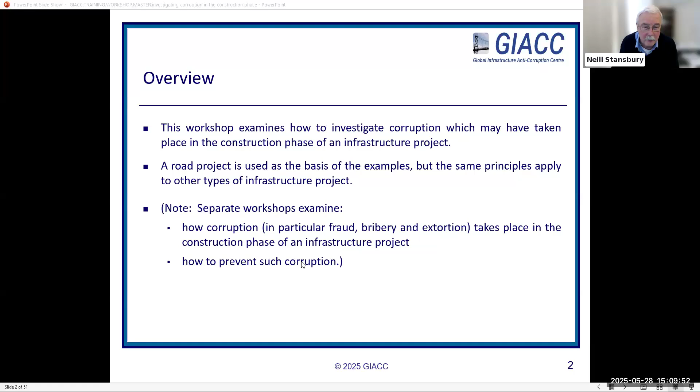So looking into it, we're going to look briefly at the contractual structure used in this example and the road construction method, just so you know the type of project we're looking at. Then factors complicating the investigation and what you need to do to prove the corruption. Then we're going to look at the case study methodology and facts, and various preparatory steps before you start the investigation. Under 4, we're going to undertake the investigation. As I mentioned, there are 3 specific issues which we will be investigating. Those of you who participated 2 weeks ago will, I'm afraid, see a little bit of repetition.

In sections 1 and 3, because of course there are great similarities in preparing for an investigation, whether you're preparing for an investigation in procurement or in the construction phase. What you need to understand and do in preparation is quite similar. So I apologize for a little bit of overlap, but I think it's necessary to restate it so that this workshop is a standalone workshop.

So first of all, these 3 corruption examples we're going to investigate in this workshop are based on a road project with a quite simple but quite common contractual structure. We're assuming there's a public sector road agency who owns the road and is commissioning its development. It is responsible for maintaining and building the major roads in that country. It appoints, after a tender process, a main contractor to build the road.

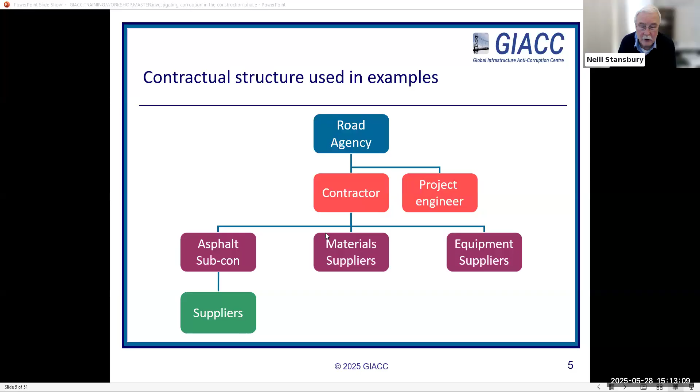If that is not done properly, the improper works are concealed by the next layer, and that is concealed by the next layer. So ultimately, you have a road where probably all you can see is the top course, the surface course. You cannot see what's underneath. So effectively, you have a gift-wrapped corruption Christmas present, because you can do whatever you like on the courses underneath if you're a corrupt contractor, and cover it all with a lovely wrapping of the surface course.

And people may not necessarily know, but then the road will break up. Then the question is why, and will the reason be discovered, and will the perpetrators be found out if they're acting corruptly? Therefore, these road projects can be so prone to corruption because of the inevitable construction method, with one course being covered by another one. Of course, you can test them, but this can sometimes be difficult and expensive.

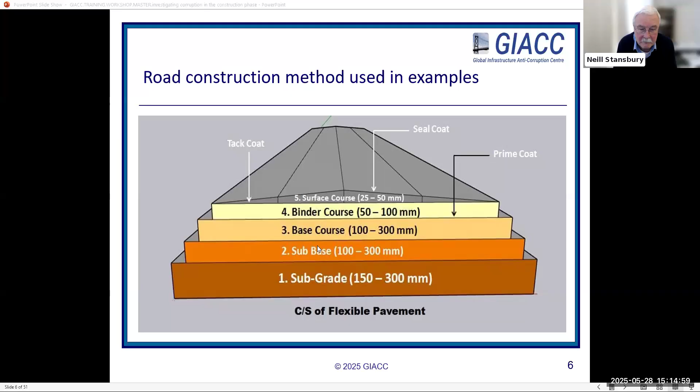What complicates the investigation, as I touched on two weeks ago, is that investigators tend to hate construction projects. They tend to stay a million miles away because of a number of factors which make the investigation complicated, time-consuming, and expensive.

One factor is you have numerous companies and individuals involved in the project. We saw the contractual structure previously, but there could be many more companies than that—the project owner, contractor, engineer, subcontractors, suppliers, consultants, numerous parties involved—and you have to understand who fits in where and what they're doing.

These participants are bound together in quite a complex contractual structure with numerous contractual links, and the structure doesn't necessarily flow top to bottom. You can have structures going beside each other—one contractor appointed to do some work, another contractor appointed to do another bit of work, and they don't have a contract with each other. They each have a contract with the project owner but work side by side. Or they could be contracted with each other. So it's quite complex to know what the contractual structure is, what the obligations are, and how these companies are bound together.

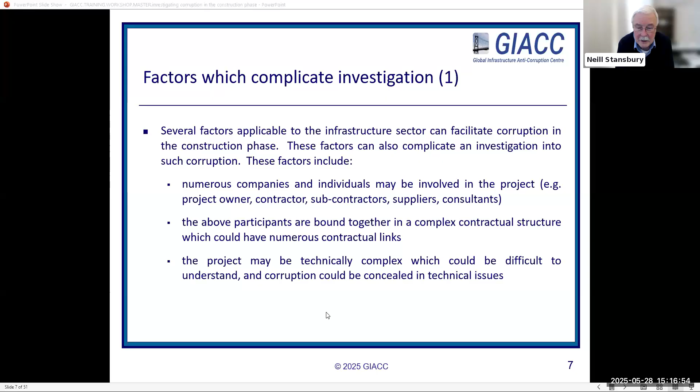The project can also be technically complex, making it very difficult to understand for anyone who's not a specialist in that type of infrastructure project. That technical complexity allows the concealment of corruption, because the person perpetrating it can tell an investigator who doesn't understand, 'Oh, we did this because of A, B, C, D.' It could be a total lie, but the investigator doesn't know that, because they're not experienced in the technical complexity.

There's also an enormous amount of documentation on a construction project, very difficult to get to the bottom of. Even people working on the project often don't seem to understand which document works where and how. You could have the contract conditions, the specification, bills of quantities, drawings, program, delivery records, day work records, test certificates, payment applications—a monumental number of documents.

Also, for a road project in particular, the road may be in a location difficult to access. The investigators may live in a totally different place to where the road actually is, and it may be time-consuming and difficult to get there. Even if you do get to the road, if it's 10, 20, 30 kilometers long, it's quite a thing to investigate physically.

As I mentioned, work items are concealed by other items. The aggregate in the road base course is covered over by the asphalt surface course. Structural steel in bridges, conduits, etc., is embedded in concrete, so you can't identify how thick it was or what quality it was once it's covered over. It can be checked, but it's difficult—it requires sophisticated testing methods.

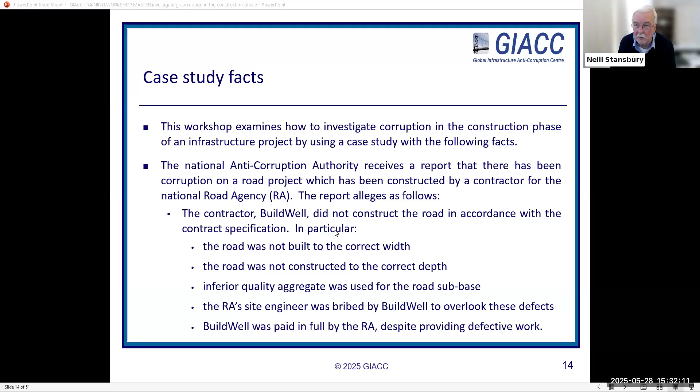Now, the whistleblower is anonymous, so I'm afraid you cannot get any further information from the whistleblower. So let's just go through, before we ask you all for your opinion, a few preparatory steps that you would take.

First of all, you've received the whistleblower report. Who's going to investigate it? This is a public sector investigation. The anti-corruption authorities received the report. It's their duty to investigate. So obviously they would lead the investigation.

But the road agency is very important in this. It's a public sector body. They may have overpaid BuildWell if it didn't carry out the work. It may have received poor quality road. So the road agency is a very important participant. They themselves want to get to the bottom of this.

But bear in mind a risk here, because it could well be that the managers of the road agency are involved in the corruption. In fact, there's a suspicion that they are, because the whistleblower suggested that the road agency paid in full. They may have paid in full because they relied on the engineer, or because someone was bribed. So be aware that the road agency may have corrupt people in it.

But on the other hand, the road agency is not corrupt. It's a public sector body. It cannot be corrupt. Only its managers can be corrupt. So you still need the cooperation of the road agency. So it may be necessary to put people on leave, suspend them at the road agency. It may be necessary to put a couple of people in temporarily into the agency to investigate, because you need their documents, you need their help.

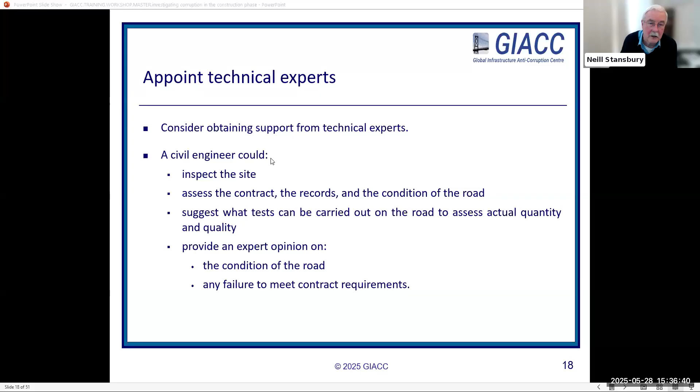You also need a commercial expert on board, I believe. Again, you may have one within your agency. If not, you need to appoint one, because you're going to have a problem here with project records. You're talking quality and quantity of construction of a road, and that's going to be concealed or evidenced by a lot of documentation. So you need an expert, probably a quantity surveyor or project manager, someone with road experience on the commercial side, who can dig into the records of the project and come up with the documents you need. Look for the inferences of corruption through inconsistency. They may also need to assess the actual quantity and quality used and a reasonable cost, what should have been charged compared to what was actually charged.

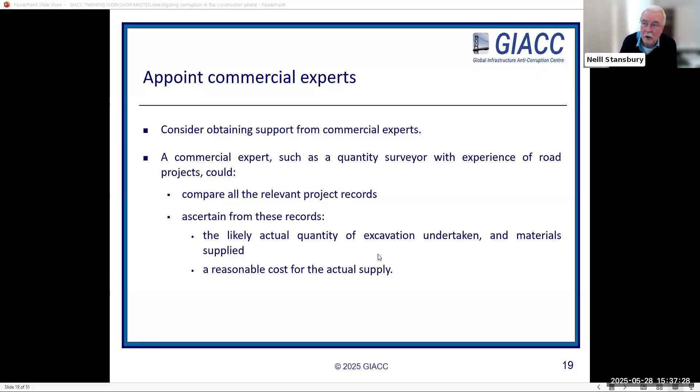You also, personally, even if you appoint an expert, I stress you should understand the project yourself. It's no good standing back and relying on experts if you are the person in charge. You should try and understand the project as best as you can. What are you talking about? Understand the nature, purpose, and extent of the project. Understand who the parties are in the project and where they sit in the contract structure.

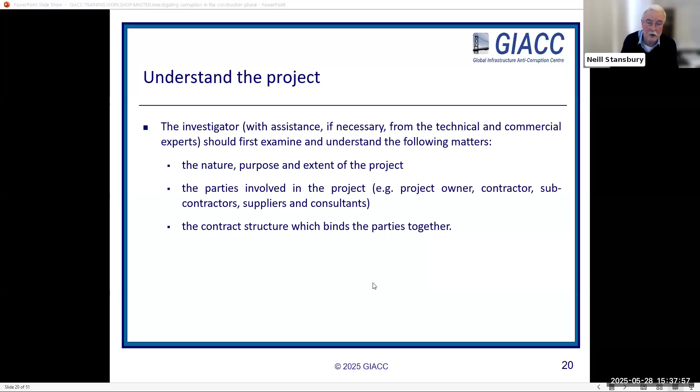You need to understand the contract, because if defective quality and quantity are being alleged, by what means do you judge defective? You judge defective by the contract and by the technical specification. So you've got to understand what the contract says. Otherwise, you may be investigating quality and quantity as defective when in fact it's actually in accordance with the contract. So understand the contract.

Understand the contract conditions, the drawings, the program. Understand what type of contract it is: remeasurement contract, fixed price contract, based on bill of quantities. Establish how the contract works. And then from that contract, establish the scope of work of BuildWell. What did it have to do? When did it have to do it by? What quality did it have to use? What quantities did it have to use? And what method did it have to use? You don't need to be a technical expert, but just understand the parameters basically, with the help of the technical and commercial experts, because otherwise you will not understand the investigation.

Understand also the program. What dates should they have completed by? When were specific milestones completed? What was the contract price? What circumstances entitle a change of the price? How were the works measured? And how were they paid for?

So once you understand that, you are now ready to look even deeper. Understand if any parts of the works were subcontracted. BuildWell may have not done the relevant work you're investigating. It may have been subcontracted to another company. That's very important to understand, who actually did the work. And if it was subcontracted, what were the subcontract conditions and who was it subcontracted to? So now you understand the overall picture of the project. You can now dig deep into the specific allegations, supported as necessary by the technical and commercial experts.

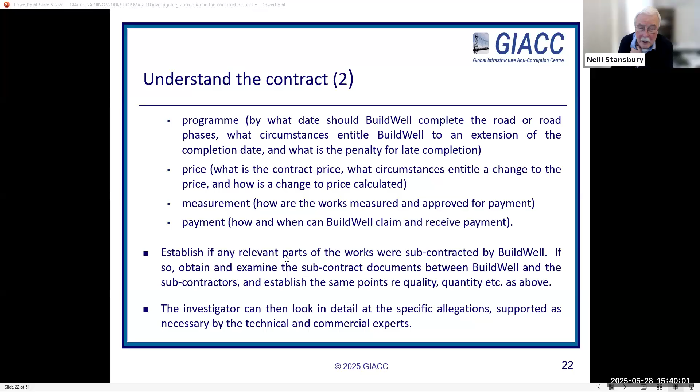So that takes us to the investigation. You're ready to go. You've got all the background information. You've got your team together. So let's look at the allegations one by one. I've divided them into three specific pots. The first is any allegation alleging defective quantity and quality.

The whistleblower, who, as I stated before, is anonymous—you cannot get more information from them, sadly—has stated that the road was not built to the correct width. Width means quantity and quality. Quantity, because there'll be less quantity of material supplied if you build a narrower road. And quality, because the road's meant to be a certain width. If it's less than that width, it's not the same quality in terms of width.

The road was not constructed to the correct depth. If that is the case, that goes to both quantity and quality. If you don't go to the correct depth, you're unlikely to have used, as a contractor, the specified quantity of materials. And also, if it's the incorrect depth, there's a real risk the road is not of the correct quality and will break up. Finally, the third point: they suggest inferior quality aggregate was used for the sub-base. That's a very specific allegation. You know which part of the road you're talking about, and they're talking about the aggregate, and that, of course, is quality.

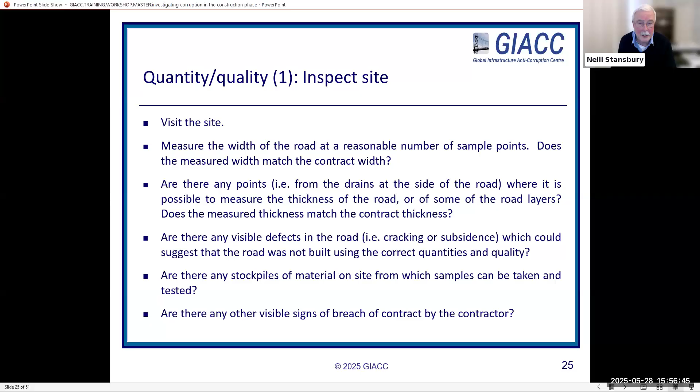So you want a site visit, which many people mentioned in the chat and summaries, probably as a first step. And your engineer, your technical expert, would be extremely useful for that.

Undertake relevant tests on the actual road quantities and quality, and the engineer can recommend what types of tests. Kamal's point, based on Alex's point in the underlying comments, is very important: value for money, because testing can be expensive and disruptive. You may have to shut the road, you may damage the road, so it's a difficult balance between the cost of testing, the disruption it causes, and the benefit you can get. But the danger is if you decide not to test, not to spend the money, people get away with the corruption, and you can end up with a corrupt road sector because people know it's never going to be tested due to the cost-benefit analysis.

So it's a real balance between cost effectiveness and deterrence. There are different types of tests the expert can advise on: non-destructive testing, such as ground penetrating radar, and destructive testing, such as core samples. The core sample is an excellent method of looking at quality and quantity in a case like this, where there's an accusation of insufficient quality and quantity, particularly in the base layer. The core sample drills a bore right through the road, top to bottom, and takes a cylindrical sample out, which can be taken away, measured, and tested. That is an excellent way of testing.

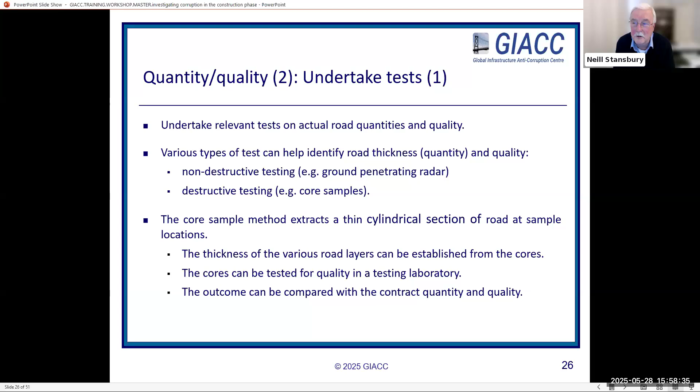But then it's a question of sample size. If you have a 100-kilometer road, how many core samples do you take so as to have a representative sample of quality and quantity on the whole road? A very difficult decision. A reasonable balance needs to be achieved between testing a sufficient sample to give a realistic picture of actual quality and quantity, the cost of testing, the damage to the road, and inconvenience to road users. All these have to be balanced together.

But from the tests you do, whatever method you adopt and whatever you test, you are testing to identify discrepancies between the test results and the contract requirements. If the test results show a difference from the contract requirements, as Mike said, you then have prima facie evidence that the quality and quantity is defective. You then need to check whether the contract had been changed in any way, and if it hadn't, you have a breach of contract. Then you need to look at further documentation to establish whether that breach was deliberate, accidental, or negligent. The testing is core to finding out whether there actually is a breach in quality or quantity as alleged.

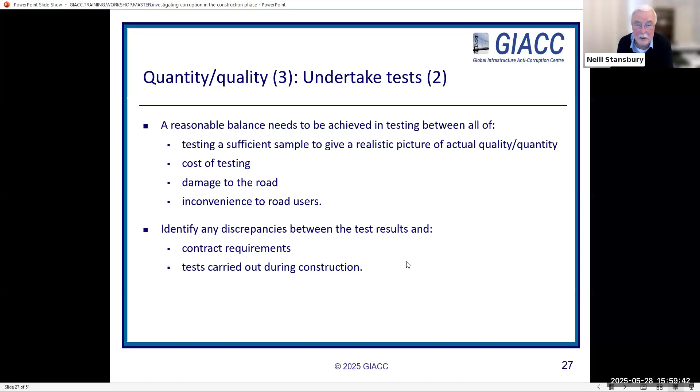So review the supply documentation. Let's assume you have discovered that the road is defective, that the quality and quantity is not as stated. Let's look at how that happened and why. This requires a pretty detailed forensic examination of the relevant documentation, as many of you pointed out in the chat.

So which materials are relevant to the complaint? Inadequate width and depth of the road unfortunately potentially affects the quantities of everything used in the road construction, because the depth and width go the whole way, top to bottom, especially the width, so you may have to look at all supply components. Incorrect quality of the subbase only affects the subbase materials, so you need to look at what materials are relevant to the complaint.

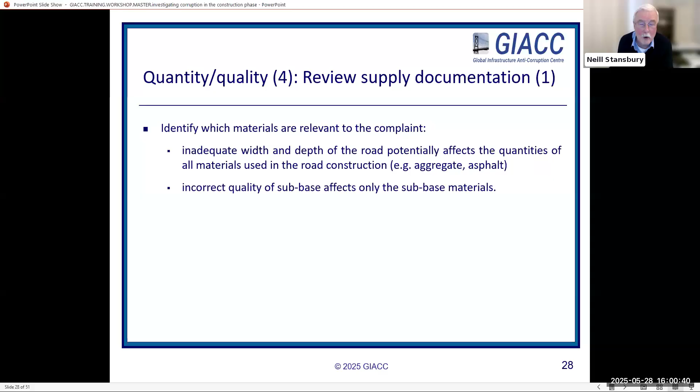Then you need to obtain the documentation relevant to those materials, and that could be a lot of documentation. You may need to obtain them from the road agency, and/or from the contractor Buildwell, and/or from the relevant supplier. Why obtain them from all three? Because there could be differences, and that's critical, because the corruption could lie in the differences. There could be a difference in the documentation recording the supply between the supplier and Buildwell. The supplier may be fabricating the documents, or Buildwell may be fabricating, or both may be accurate. So there are a number of options, and you have to look at all the documentation. What could these include?

If we're talking about aggregate, it could be the purchase contract by which Buildwell purchases materials from the supplier, for example, from the quarry. Supplier delivery records of the materials to site, assuming that the quarry delivers the aggregate in its trucks to site, it has its own delivery records. Buildwell will receive each truckload of aggregate on site and will presumably have its own delivery records.

The site supervisor will sign off each truck receipt. There probably should be day records from the site supervisor or project manager, whoever is keeping the records, which record what materials have been delivered and what use they've been put to. Then the engineer should approve the materials placed on site.

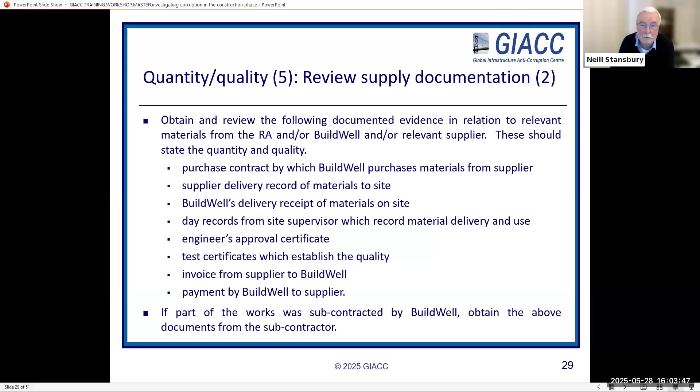And then what you do basically is compare and look for inconsistencies. This is somewhere where artificial intelligence would be brilliant if brought into play, because it's very time consuming to compare these documents. I've spent many days, weeks trying to compare documents on investigation, with QSs trying to see where the inconsistencies are. Whereas AI on an electronically automated contract could pick it up within seconds.

But what you're looking for is inconsistencies. If the supplier supplied 1,000 cubic meters of a certain type of aggregate to site, what did it supply that in? Which trucks did it supply it in? Were there sufficient trucks actually to supply 1,000 cubic meters of aggregate? Was 1,000 cubic meters of aggregate received? Was 1,000 cubic meters of aggregate placed on the road? Were there sufficient types of equipment actually to lay 1,000 cubic meters of aggregate on site at that time? You're looking for inconsistencies which show that that quantity of aggregate was not actually physically delivered.

And you compare all these documents with each other and with the test results and with the contract, and you're looking for inconsistencies. To help you on that, you want to find out what the contract quantity is, and the contract may specify the quantities actually physically in the contract or the bill of quantities, or you may be able to measure from the drawings.

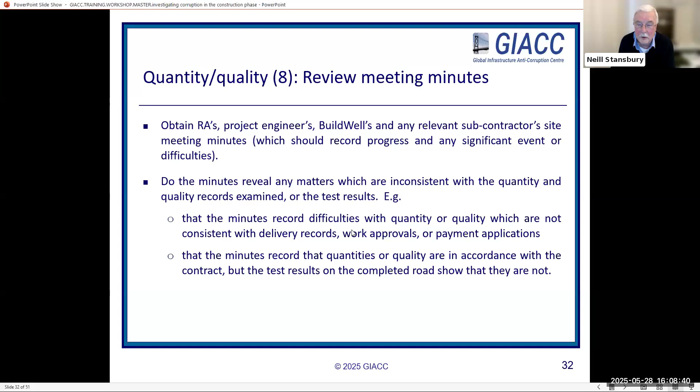Look at correspondence. So all of this implies you can get hold of the records of all the parties involved, which normally involves some sort of police investigation. I am actually involved, interestingly, in a police investigation at the moment. I've been intrigued to note that the police managed to obtain all of the contractor's records from their server provider secretly. They were able to obtain a court order against a contractor and obtain all of their emails, correspondence, drawings, everything without the contractor knowing they'd obtained it. So a wonderful opportunity for the police to investigate. Get hold of their records somehow.

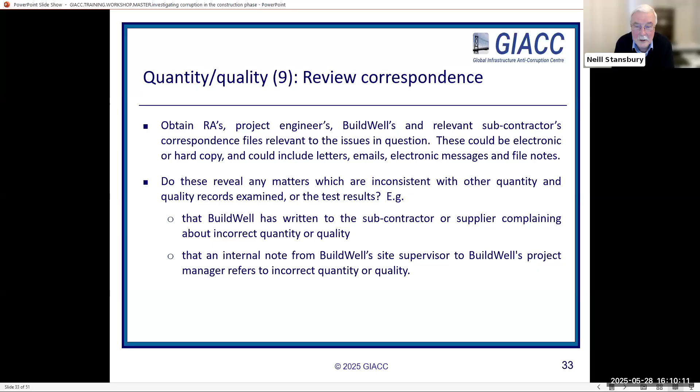Review the correspondence. As you are all aware, on construction sites, people can get very contentious. People fall out, get very angry with each other, put on the football shirts, etc. There's a lot of angry correspondence alleging breach by other parties, threatening them with non-payment, threatening them with whatever. Often those letters, emails, texts, etc. can be inconsistent with the amount claimed by the contractor in the payment application and the amount approved by the engineer. So look for inconsistency between the contracts, correspondence, etc.

Review equipment records. This is key, actually, because all construction site activities require equipment to perform the major tasks. If you're excavating the road base, you need excavators to excavate. You need trucks to take the materials away, bring materials in. You need rollers to pack the material. And you need sufficient equipment on site to do it. It seems pretty obvious, but it's remarkable in how many investigations you discover, by a simple calculation of outputs and a simple check of the equipment on site, that the contractor could simply not have done the volume of work they claimed, with the amount of equipment they had on site, working the hours in the day they actually were working.

So the equipment records of the contractor are critical to see what was on site, what the output of that equipment was, how long they were working for, and whether they could actually have done the work they claimed to have done in the time available on the dates available. This is where you often find a huge inconsistency in contractor claims.

If they do have equipment records which are consistent with the output, find out who the drivers were. Look at their personnel records on site and ascertain whether there were sufficient drivers actually to drive that equipment. If there were sufficient drivers, find out who they were and interview the drivers to see whether they actually were driving on the days in question. Obviously, this is a very detailed investigation, takes time and money, but this is the only way you can really get to the bottom of it, unless the contractor or other corrupt party has been really careless.

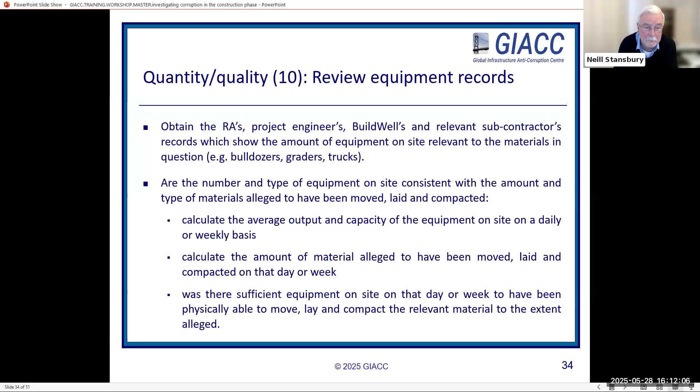Photographic records are very useful. People take a lot of photographs today, and mobile phones often tend to date stamp them. Do the photographic records of the project correlate with the claims? So when the contractor claimed to have completed a certain amount of work on a certain day, do the photographic records back that up? Often they don't.

Look at the payment claims, because this is the ultimate document. There's a point at which the contractor can claim mistake - they say we made a mistake, wrong delivery, we were going to correct it. But once the payment application goes in, it gets very difficult for the contractor to claim mistake, because when they claim for payment, normally monthly or by milestones, they're meant to be claiming for a specific amount of work done in a specific period with specific proof. That is the point at which the contractor annexes, electronically or physically, the supply documentation and equipment records to a payment claim, a bill of quantities, and claims payment for that work done.

Once they've done that, there's an expectation that the contractor has taken reasonable steps to ascertain the accuracy of their claim. Therefore, if the claim is for more than the work actually done, or for incorrect quality or quantity, there's a reasonable presumption that was a fraudulent claim, because the contractor should have known what they've done - they're attaching records which they should have checked were correct. If they're not, it's a hard hurdle for the contractor to overcome. So look at the payment claim to see what they have claimed and what they've annexed to it.

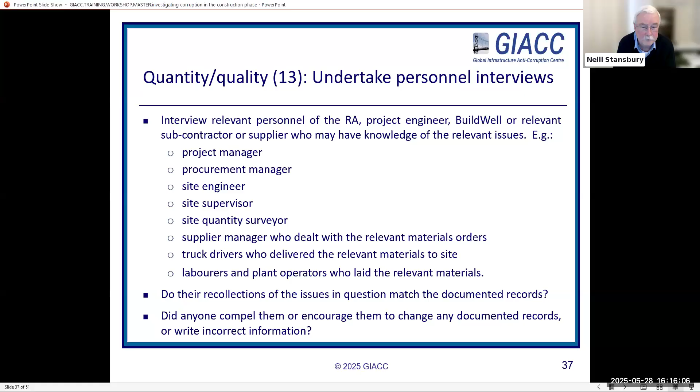That's been one hell of a job, made easier by AI one day. But to the extent you look at all the evidence, all the documentation, all the facts, and there is evidence that the actual road construction in terms of quality and or quantity was not in accordance with the contract - proven by test results or physical results - and you've proven that the contractor claimed for quality and quantity which was not in accordance with the facts, then you have prima facie evidence of a defective road, not built in accordance with the contract. Secondly, you have prima facie evidence that the contractor claimed for payment for work it had not done. So you have a pretty compelling case.

And so now your question is, can you infer corruption from that or not? To do that, you need to look at all the cumulative evidence we just talked about, and you have to make a decision. Do the facts, the documentation, the consistencies or inconsistencies in interview evidence, point towards an accident - a total genuine mistake, building the wrong road and claiming the wrong amount? Could it actually be an accident, in which case there's no crime? Or could it be negligence - they should have known better but didn't properly check? It wasn't an accident, but they were just negligent, and that again is not criminal. Or on the other hand, was it deliberate? Did they do it deliberately, or did they just not care?

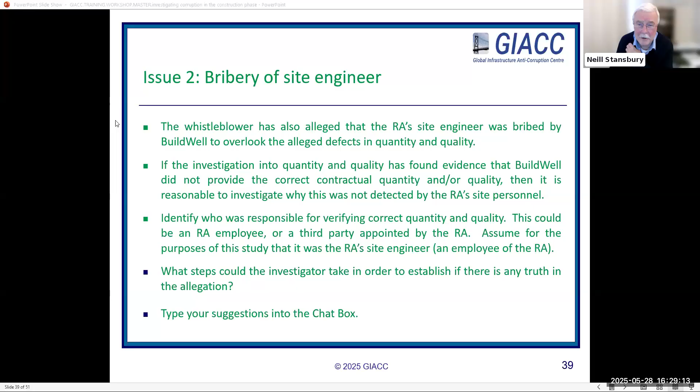Thanks very much, Mike and Kamal. That's great, some great comments there, and I think it's summarized in a nutshell. So I'll just summarize my points. What we're saying here is: we know as a fact the road was defective, we know as a fact the contractor made a claim for full payment incorrectly, we know as a fact the engineer approved it wrongly. So the only question is, were they acting innocently, negligently, or corruptly?

So as Kamal touched on at the beginning, identify the role of the site engineer, because it could well be that the site engineer himself or herself was not the right person monitoring - it could have been a deputy or another person in the organization. So work out what the role of the site engineer was, who was observing, and interview them as to how much time they spent on site, what steps they were meant to take to verify and record quantity and quality, because surely they are approving quality and quantity on behalf of the road agency. Surely they're meant to witness it in some way, or a deputy is meant to witness it. So why did they approve it when it was incorrect?

So what steps should they have taken? Then compare that with the steps they actually took to verify and record quantity and quality. Did they personally verify? Did they measure? Did they take photographs? Did they do tests? What certificates were issued? Did any deputies do it on their behalf?

Were they instructed by anyone else to approve quantity or quality, even if they weren't happy? For example, did the road agency chief executive say to them, just approve it, and if you want a job in the future then approve it and just turn a blind eye to things? Did someone make them act corruptly? And also, as Mike mentioned, were they receiving any payments from Buildwell, gifts, hospitality, or anything in connection with the project? So what you're looking for is, as a fact, they signed incorrectly.

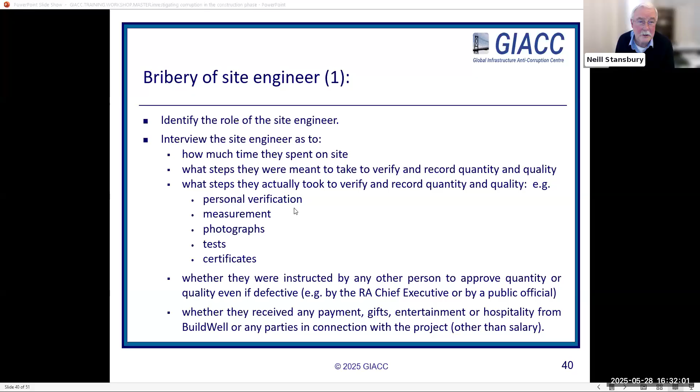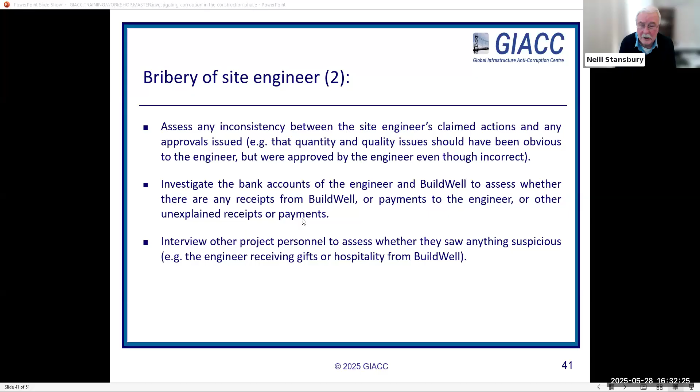So you need to look at their records. Investigate the bank accounts of the engineer. Did they receive any payments? Investigate the bank account of Buildwell. Did they make any suspicious payments which could have gone to the engineer? Assess inconsistency between what they claim to have done and what they actually did. Interview other personnel to assess whether they saw anything suspicious, like the engineer being entertained by the contractor.

And then look at all the evidence and say, okay, we know for a fact the engineer incorrectly certified. Look at all the evidence we've got of gifts, hospitality, payments, what they did, inconsistencies in the documents, and can we draw from that an inference of corruption? Or was it just a very tired engineer making a mistake or acting negligently, but with no corrupt intent.

I can't speculate here based on the facts we have, but you should, from your investigation, be able to draw an inference of either accidental or negligent or deliberate. And as I mentioned before, if you have the fact of an engineer signing an incorrect certificate, and you have the fact of a cash receipt or entertainment or gifts, I think the inference is inescapable.

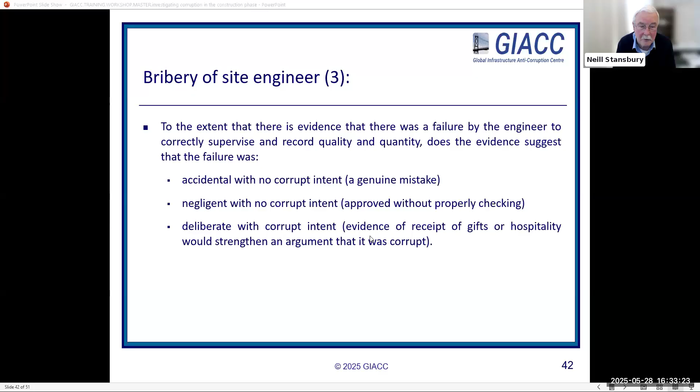So I'll just run through this last one very quickly. So we've now established incorrect quality or quantity, and yet, despite that, the contractor has been paid in full. So the contractor built a defective road, but got paid by the road agency for a proper road. Now, could there be any suggestion that the road agency personnel were acting corruptly?

Now, interestingly, the whistleblower doesn't say they were. It just says Buildwell was paid in full by the road agency despite the quantity and quality defects. But I think you are justified as an investigator to dig a bit more deeply into this, because could it be that the road agency relied totally on the engineer's certificate and paid?

And I think probably you'd say that may be quite fair, because the reason the road agency does appoint an independent engineer is to be able to rely on the engineer's certificate. The engineer is meant to do the hard work of verifying quality and quantity and certifying the payment. So if the road agency paid in full relying on the engineer's certificate, it could be quite a fair action to do so.